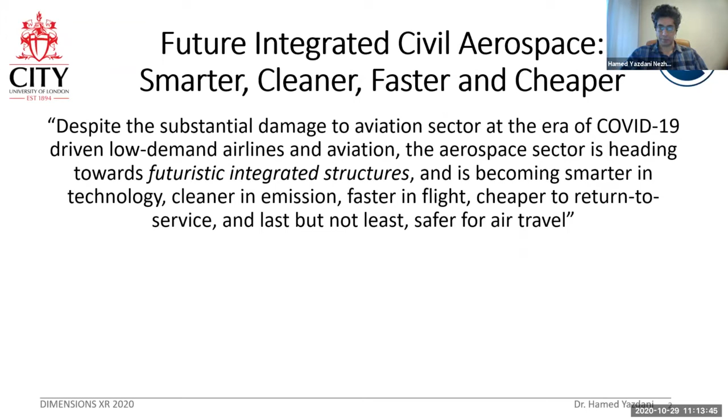My talk is mainly about future integrated civil aerospace: smart, clean, faster and cheaper. This is something I captured from my abstract. I want to draw your attention to the fact that we're moving towards futuristic integrated structures, and despite the ambitious and adventurous look into the future, there are still challenges to overcome. But everything looks very promising for future aerospace at the moment.

I'll come up with an agenda outlining some of the urgent needs, and explain a little on the state of the art in this area. I'll talk about integrity compromise upon integration in aerospace, and integrity improvement possibilities, mainly focusing on new adventurous topics rather than the mature, already well-developed technologies. Moving to fastener-less technologies, and the research we've been carrying out for years, and also the possibility of embedding multifunctional composites for improvements.

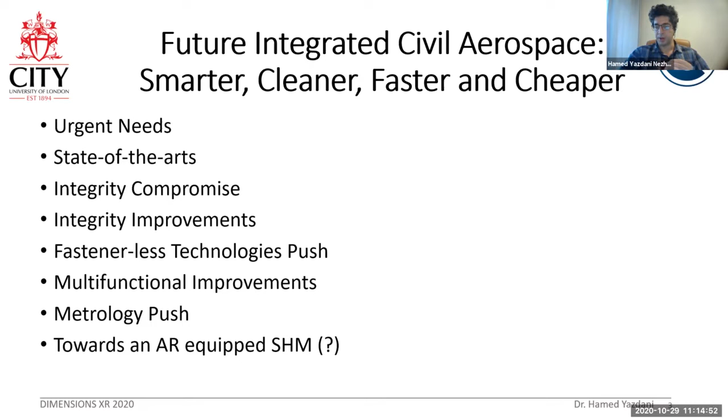There's a huge push towards metrology, especially in structural health monitoring, or SHM, and that's where this talk will be more relevant to this conference, when I talk about towards AR-equipped structural health monitoring. So let's start. That's where we're at.

That's actually one of the main motivations and inspirations for the push towards eco-friendly, sustainable, and smarter aerospace and aviation. What we are about to experience hasn't been experienced for about 3 million years, in terms of the temperature rise and its effect on climate change, and we're already going through that year by year, and sometimes month by month.

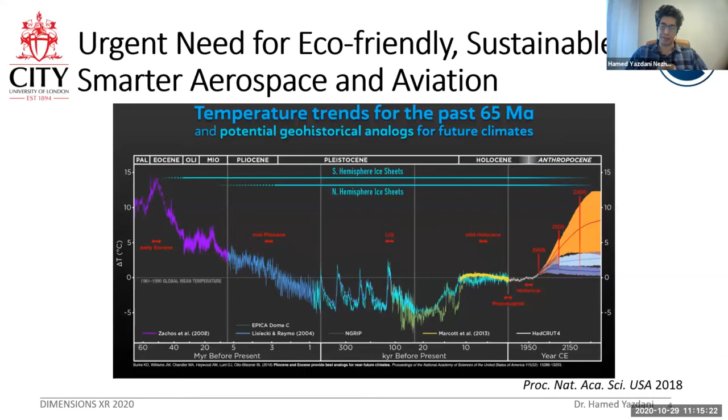That's where we need clean energy equipped transport, integrated light structures in transport, in-flight connectivity, eco-friendliness, and cost-effectiveness, of course, for the development of any processes in terms of integration, assembly, and manufacturing.

That brings up an academic question. Most of this talk is going to be about that: if you're going to bring up new integration and instrumentation technologies, what would be the science behind it? How do we develop that? Have we got mature science backing up such integration and instrumentation, or do we actually need to develop a new direction in science, come up with breakthrough innovation, and come up with whatever eco-friendly, smart aerostructure we need. This I've captured from the European Aviation Safety Agency report 2019, and I think they repeatedly put this in many reports they publish annually.

And the whole message is here: this is the schematic for a 1 hour flight of a 2-engine civil aircraft, say 150 to 200 passengers on board. For a 1 hour flight, about 1,000 kilometers, the engine or aircraft will emit about 8.5 tons of carbon dioxide into the stratosphere, which is a sensitive layer of the atmosphere, and that's the main reason it's causing climate change.

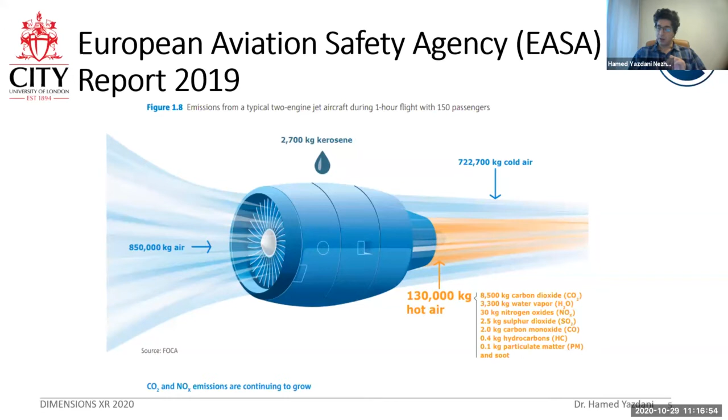This is before coronavirus, but if you capture a flight radar snapshot from that era, you see how catastrophic it can be if you multiply that effect of 8.5 tons of CO2 by the number of aircraft and by the number of flight hours. So it's quite a catastrophe at the moment.

It's great that we've got urgent actions in place, like the Paris Agreement 2015 on climate change, and European regulations related to significant reduction of CO2 in transport structures. That's a very clear message: the top level leaders of the world came together for the first time, probably in the world, to have a unique voice in terms of taking necessary climate change actions to avoid the next extinction for many species on the world.

And with UK support as well, we've got the Jet Zero plan by the council, and there are clear moves and developments in the UK. There are loads of panels, publicly available on Google - you'll see the panel members, almost all of the serious aerospace and aviation industry are on board in the panel and chairs for the Jet Zero plan, to create net zero carbon emission flight by 2050. And that's actually everywhere, for every government.

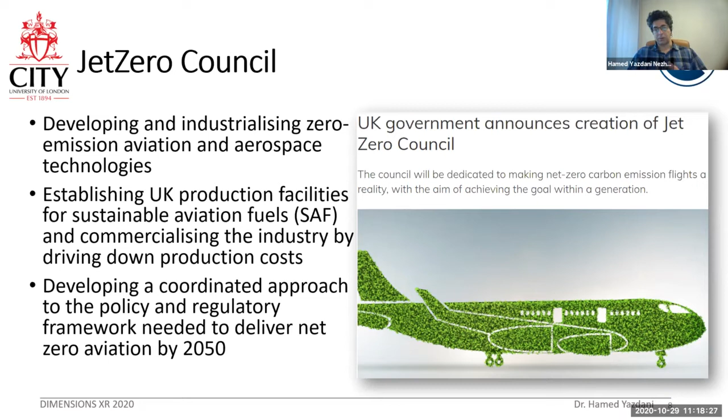It's been out for about three or four weeks now. We got very good news from Airbus that they're moving with a new fleet of zero emission flights, let's say ZEROe, by 2035, which is great news for everyone working in this area. It will bring a push towards new technologies and pioneering activities that bring new kinds of job creation. So it's a great push from the industrial, economical, and societal point of view.

These fleets will be equipped with hydrogen propulsion, called the ZEROe concept aircraft. We're not too far from that. This isn't something developed overnight - for decades people have been working on such concepts, and in academia we also work on developing new technology, which doesn't only involve materials and manufacturing development, but also instrumentation and digitalization technologies.

There's a lot of talk on autonomous vehicles and AI at this conference, and this might be relevant - AI-equipped technology can help us make not only eco-friendly structures for transport, especially aerospace, but make them smart and autonomous as well.

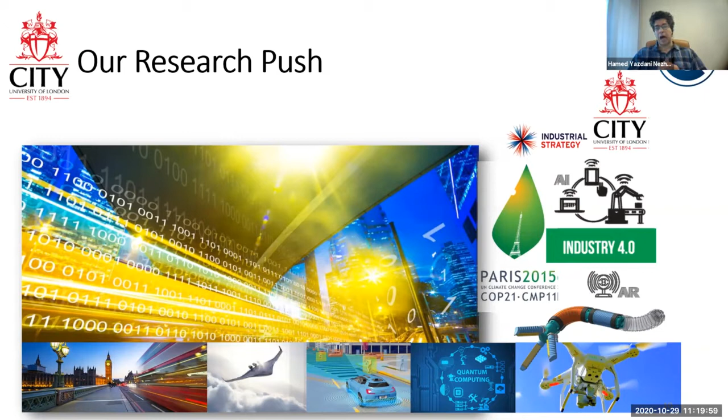I've been honored to work for quite a few years on this very ambitious project - that's one example of a movement that started decades ago. This MAAXIMUS project, if you Google it, is short for More Affordable Aircraft through eXtended, Integrated, and Mature nUmerical Sizing.

Look at the size of this project - it's just one example of Seventh Framework Programme European Council funds, from thousands. There were 57 partners across Europe for more than about 8 years of research on this MAAXIMUS project, led by Airbus, including both academia and industries, and of course public services and the regulatory sector.

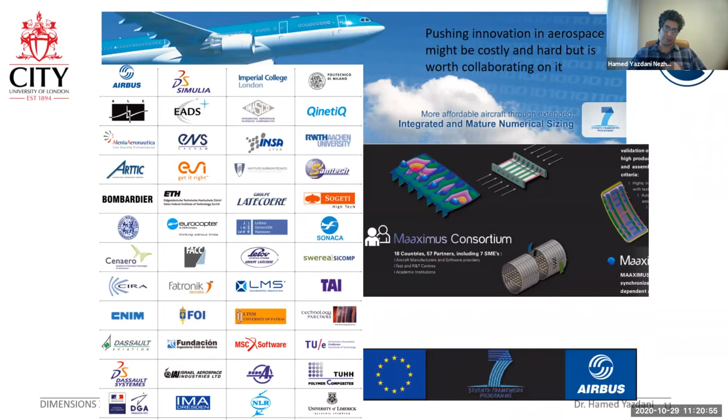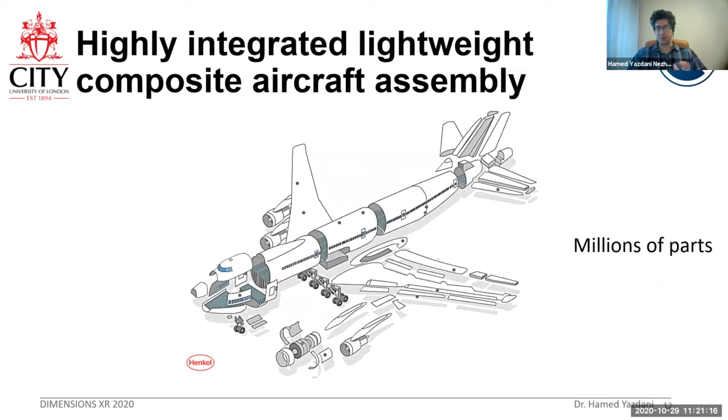Going back, focusing on aerospace, we're talking about a highly integrated, highly composite aerostructure. An aircraft, let's say a civil aircraft, is comprised of millions of parts - this is already an amazing structure.

There are lots of assemblies already existing, and one focus of my research is composite assembly, or composite joints, where a composite part is joined to another composite part - or it can be a metal part, or other materials like plastic. This is relevant in both primary and secondary structures of an aircraft.

That doesn't mean it's without challenges - there are loads of challenges when you come to assembly, whether you go bolting, riveting, or bonding structures, especially for secondary structures, and especially for composite repair assembly, let's say in MRO. There are lots of challenges to achieve the highest integration possible.

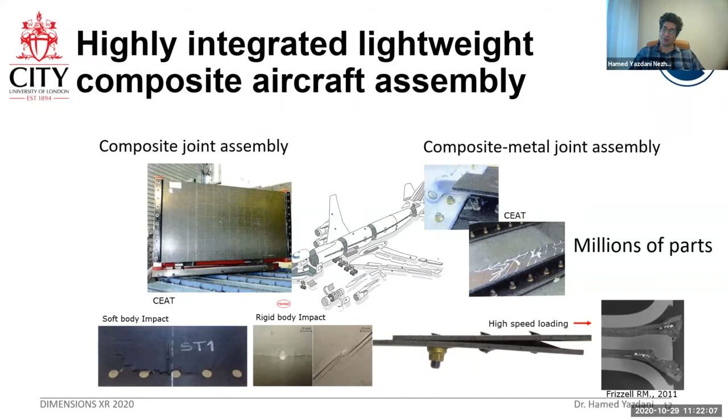Look at this aircraft, the A350, a very successful composite aircraft developed by Airbus - 53% of its weight fraction is carbon fiber. Imagine that this was one of the early aircraft designs to actually develop composites for primary structures.

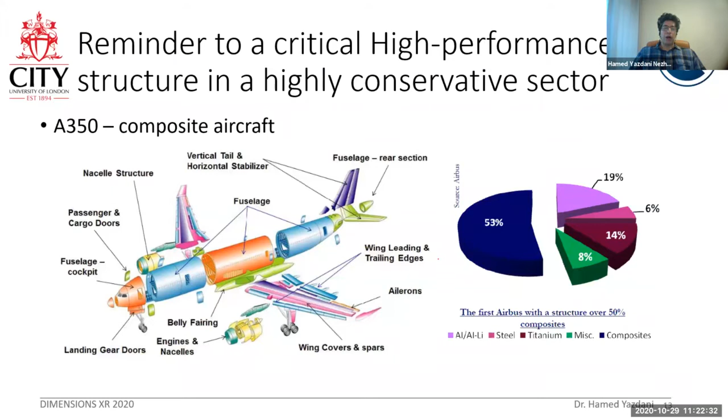So how do you actually come up with highly integrated structures for these aircraft, to avoid damages? And it's not just damage on the ground in the MRO, like a ground vehicle hitting it, for example - it might be damage from a lightning strike, or bird strike simulation. Bird strike events might happen especially during takeoff and landing, but also in service.

This is a very common subject area that designers and aerodynamicists are designing for - flutter. What flutter might cause on a composite aircraft, or a highly integrated composite-metallic assembly aircraft, as you move towards these eco-friendly structures.

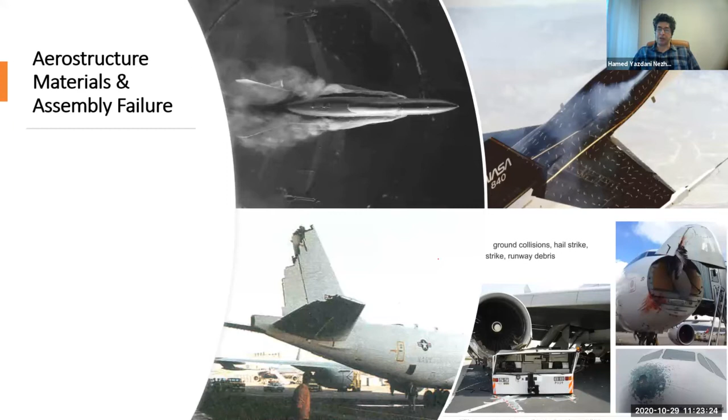These sorts of things can be very catastrophic in terms of the life cycle of the aircraft. But you may not end up with a catastrophic failure - you may have an impact damage instead.

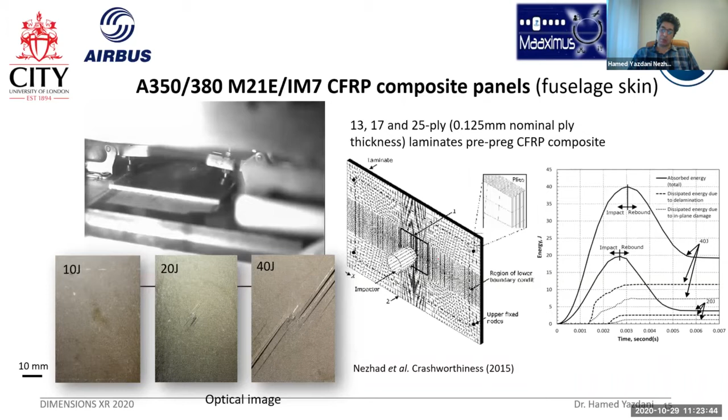This is called low velocity impact damage, which may induce barely visible impact damage inside, and that can still exceed the designated extension area in the SRM, the structural repair manual. This might cause future issues if it's barely visible and not detected properly - you don't know exactly where it's been hit, because your specimen doesn't show much damage at 10 joules or 20 joules.

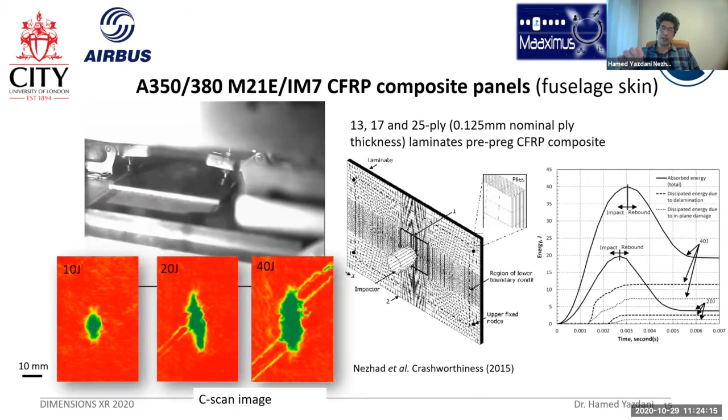But when you do, if you know where it's been tapped, if you do the C-scanning or X-ray, you would see the extent of the damage. And that's where repair becomes very important. Repair, mainly for composite aircraft, has got loads of challenges because you don't want to put a bolt inside a primary structure.

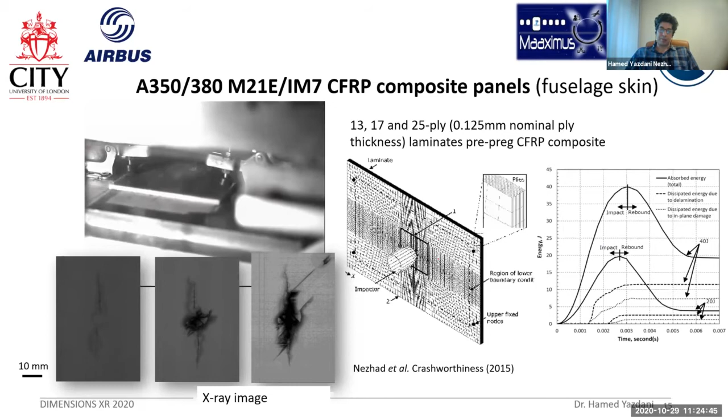Which is carbon fiber, or the toughened material like the M21 epoxy material in A350. So what you're going to do is actually take care of it by bonding, mainly bonded assembly. The new concept is asking how much of this damage is dissipating the impact energy. Based on my research and my colleagues' research, more than about 60% of impact energy is dissipated by interlaminar delamination in laminated composites.

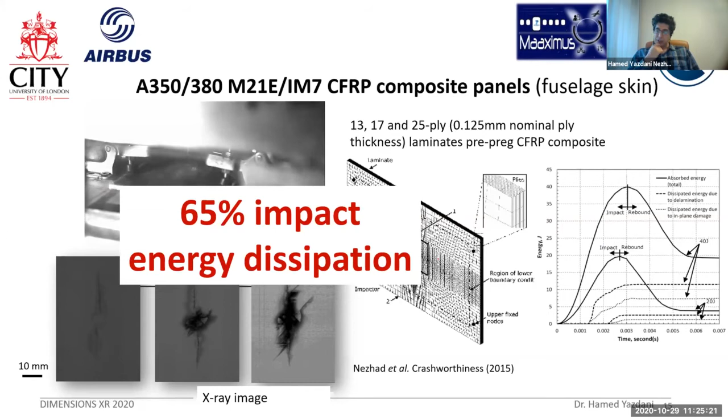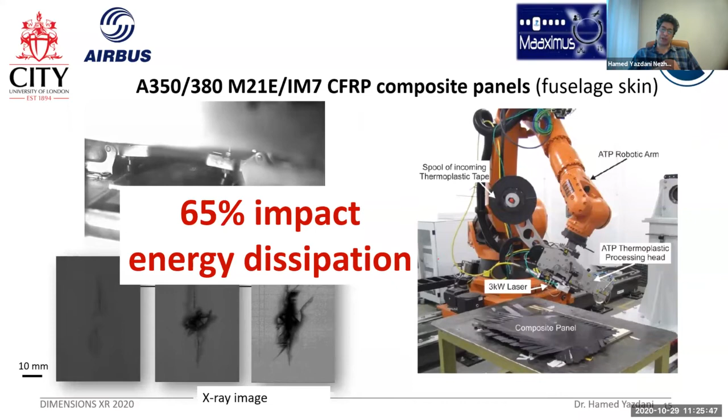One of the amazing technologies developed by Boeing was the Dreamliner B787. An amazing, magnificent, huge filament winding facility that put the different parts of the fuselage all together, wholly integrated, rather than coming up with pre-preg laminate manufacturing or automated placement. In that technology, they did the filament winding of carbon fiber totally continuous in different directions across the huge structure of the B787, which was partially cured with the resin, and then they put the whole structure inside a huge autoclave facility.

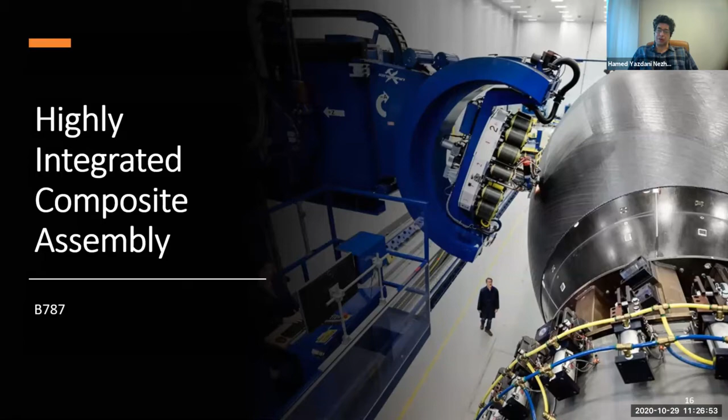That's the scale of the highly integrated structures we talk about, especially for lightweight critical structures like civil aircraft made by composites. But in the assembly, there are different phenomena happening. We mainly deal with bolted structures and bonded structures. The message here is that the damage mechanism introduced in different types of assembly is different from one another.

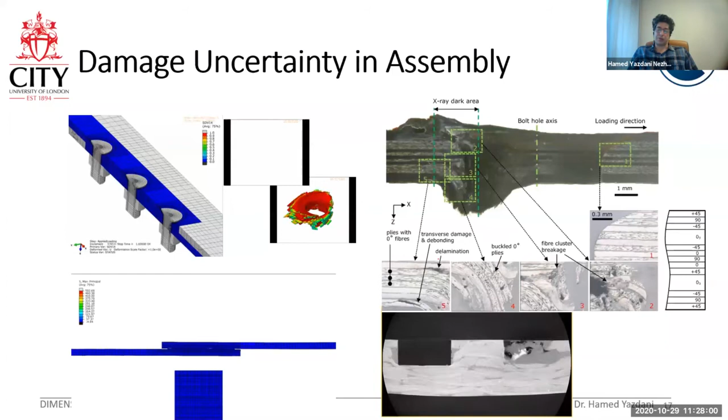Once you introduce one thing in the middle of the uncertainty, you induce a new complexity into the structure. That's what should be taken care of in every kind of design assembly to meet the design limit load in aerospace. One of the challenges again - once the damage has happened and it is repairable, that's the extent of the repair you may go through. The market grows, the worth of the market in terms of turnover is about $22 billion.

And that's the scale - it's like a clean room. If you see the top left image, you have to avoid any kind of contamination, moisture or dust in the air getting involved in the polymerization, because you're working with something vulnerable to moisture absorption - that's polymer. If you're going to do bonding, let's say if you're going to do a co-curing, something like that, there are some other technologies available at the moment for a small size of damage.

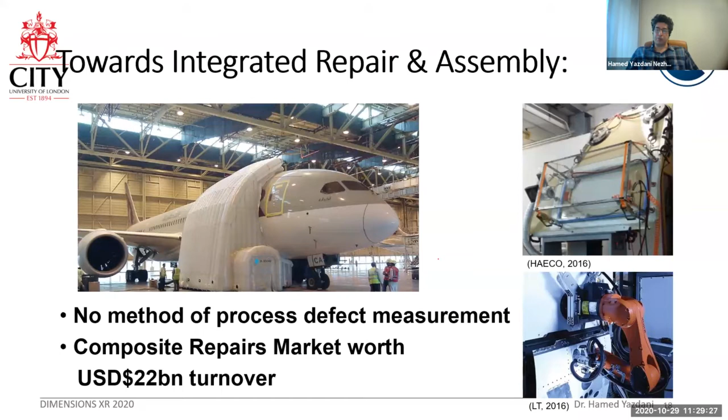Like the right-hand image, like the HAECO innovation for a protective environment, and also the brilliant CARE project, led by Lufthansa Technik. I took this image in 2016, but I think the project started years before that, when regulators like EASA were guiding Lufthansa Technik and many companies attached to that, to come up with a fully automated bonded assembly for the repair process. I highly encourage you to look at the CARE project in future.

We have done some activities as well to come up with a highly integrated structure, not having a single bolt or fastener - that's sort of the fastener-free technology. The person you see doing this is our brilliant senior technician, Jim Hurley, who's been working in composites for about 30 years, three decades of experience.

And we came up with this wing box demonstrator throughout the FLAVIIR project, which I started probably 10 years ago. On the bottom side and at the top side, you see the cross section of this wing box demonstrator, fully made, highly integrated, and you know what? It worked very well.

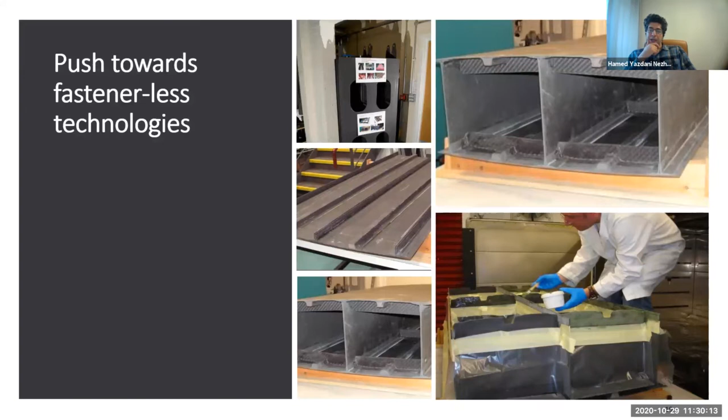Another project at Cranfield University, the FLAVIIR project, or called shortly Flapless Air Vehicle Integrated Industrial Research, was looking at making military UAVs made of highly integrated composites, fully composites, either in the ribs and struts inside, or in the skin of wings or the fuselage.

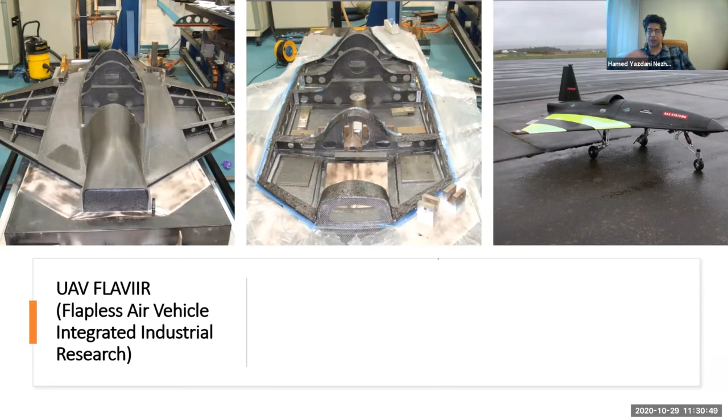That went very well as well, and you can actually look up the video of it being successful in terms of the flight. At the civil aircraft level, of course, people are looking at automation.

This is the state-of-the-art concept already developed. Why is that a schematic? Because that's in the Clean Sky project, for example. We're actually waiting for this to be developed.

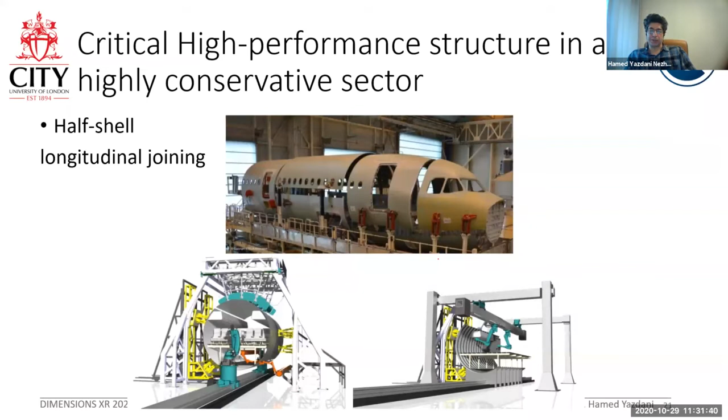If you visited by any chance Safran Composite in south of Paris, as I did last year, you might see a 6-axis amazing robot for taking control of the thickness of the bonding throughout a composite-to-metal or composite-to-composite bonded assembly. That's the scale we're looking at to avoid any human error, avoid any contamination, avoid any uncertainties induced in large structures.

That's another concept taken from Clean Sky last year. Airbus Space and Defence, that was actually this year CFP 11, I think, call of the Clean Sky. Airbus Space and Defence is looking for technology that can manufacture a civil aircraft wing made of longitudinally continuous carbon fibers on the skin, and inside chop fabric, adhesively manufactured or 3D printed, let's say, or 4D printed ribs, still composite but chop fabric ones.

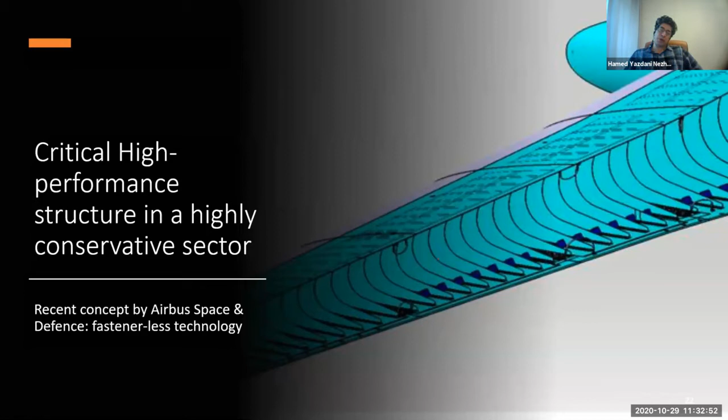Both composites are thermoplastic, either in the skin or in the ribs, mainly because we can not only make it very eco-friendly and highly integrated, we can take advantage of already recycled chop fabric materials that have been proven very useful in providing uniform distribution of properties called quasi-isotropic. So the world is moving toward that, and there are amazing plans by 2035.

We have been actually working on some of these. We try to make this as smart as well. This is one of the projects I was leading, looking at the structural scale, still in laboratory experimentation, to see if I can induce some functional nanomaterials.

In my case it was, for example, graphene and carbon nanotubes. Can I not only improve the structural integrity, but also induce some reliable measurement, especially for cyclic loading? And it went well, actually.

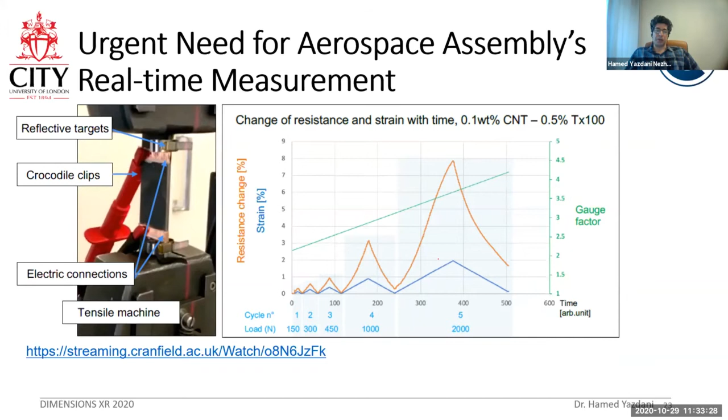We published some of the work in Nature Scientific Reports, reporting that at the structural scale, you would be able to achieve reliable measurement, especially at cyclic loading. Our cyclic loading was increasing loading as well, so it was not like a constant loading during the cycle.

So we came up with a kind of simplified process as well, because processing a new mixture of material, embedding a functional nanomaterial inside a structural grade or aerospace grade epoxy material, is very difficult. It also induces new uncertainties at different locations across a large scale material. You might have different dispersion density and dispersion quality, meaning that at different locations you might end up with different properties.

For our case, enabling strain sensing or smartness in this structure means different sensing, piezo-resistive or piezo-electric properties. That's where we actually reported on a very efficient process and interpretation technique.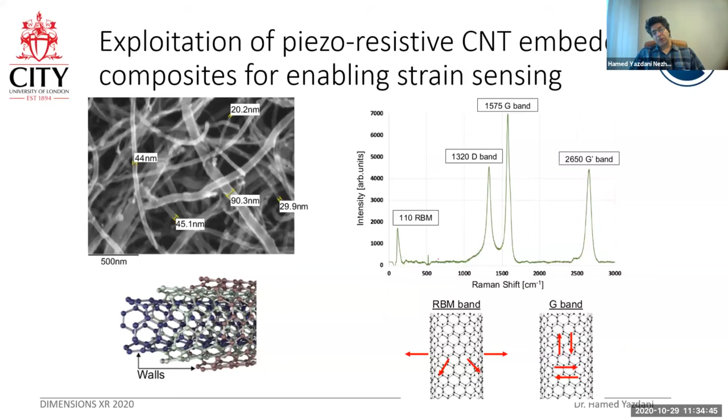You may actually have a look at this Nature Scientific Reports paper we published this year, where we came up with an interpretation technique using this carbon nanotube embedded adhesive for a bonded assembly, still reliable at a structural scale, for cyclic loading and cyclically increasing loading, for detection of adhesive bond defects. That's one of the challenges in the aerospace industry for bonded assembly as well.

You may induce zero thickness defects during a process, either because of not taking care of the process parameters, or because of contamination being involved. So you might end up having zero thickness defects, but the problem is it's very difficult to identify or detect that defect using non-destructive inspection.

Once that's made and part of the structure, you cannot cut it out and examine it. That's why it's very important for NDT technologies to be able to detect such zero thickness defects.

So we say that if we actually embed such a smartness-enabled material, come up with a new interpretation technique, we will get some reliable signals of when the adhesion is going to fade. But I'm going to show you the challenge right now in this video.

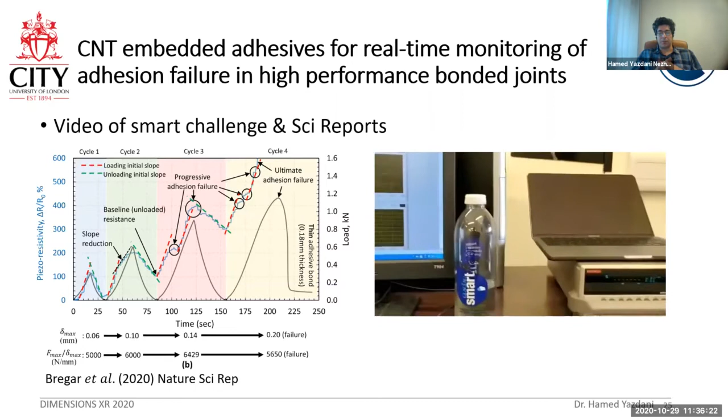We're showing that the system is working properly. We can extend it using the proposed embedment technique from the journal paper. But look what's going on here - let me move it down. Yeah, a load of blah blah. That's our specimen there, and we're looking at that with the laser extensometer for validation as well.

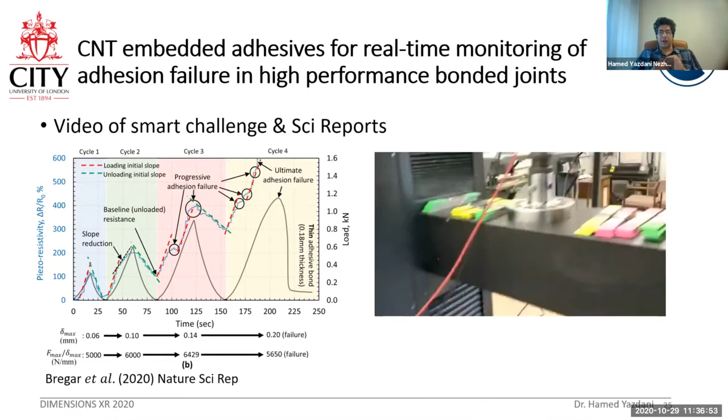But look what's going on. So we got the two-probe technique at the sides of the specimens connected, and it's going to be associated with loads of electronics as well. So where are you going to put these electronics? This is a flat specimen - what if we got a non-flat specimen? How are you going to actually embed such technology in non-flat specimens? So that's one of the challenges.

The scale-up possibility is this. I would say it is very, very possible to take advantage of our continuous nanofiber production and make carbon nanotube at the scale of 100 nanometers diameter, but in meter lengths. And then actually fit that inside a tufting machine like this middle image, and program it to make totally smart materials, highly reliable on every kind of sample, either flat or non-flat specimens.

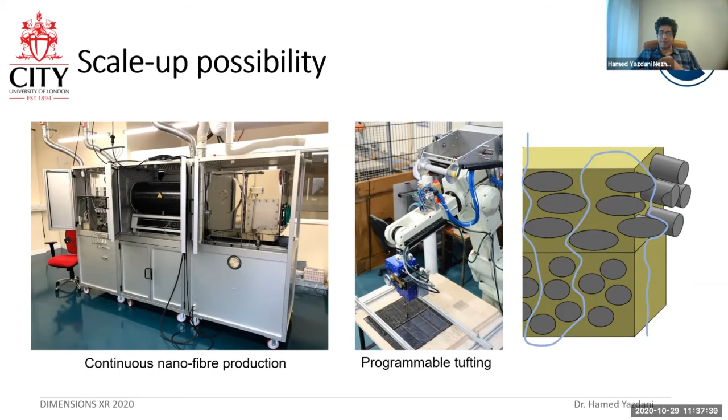All kinds of smartness technologies taking advantage of piezoelectricity are already out there. And if you want to know where that's been used - in piezoelectric sensors, right? So there are loads of sensors already developed, relying upon piezoelectricity as a good property to give signals when your material is being deformed or damaged.

But the thing is, once you actually use, for example, a PVDF material as a layer inside, in terms of thickness it's comparable or still considerable at the level of the thickness of a prepreg laminate. For example, if you've got 200 microns, you might have about 100 or 50 microns of thickness from the PVDF. So if you imagine laying it up over 32 plies, for example, for one section of an A350, you're going to add thickness to that side of the composite component, and also you may add to the weight.

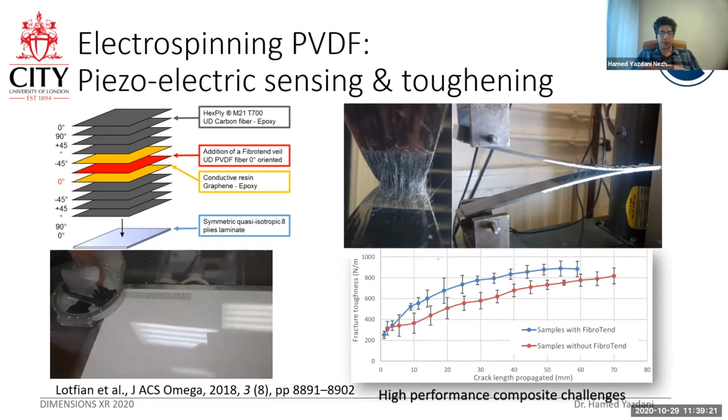Smartness versus structural integrity is always a big issue, and you have to take care of it once you use functional nanomaterials - though they're very low weight, they're very advantageous in enabling smartness in structures, but they compromise the structural integrity. If you want to know how they easily compromise that structural integrity, you can look at our journal papers in the Journal of Polymers. That was ranked the second top highly cited paper last year in 2018 and 2019 - this Q1 journal, which made us so happy because it showed the impact of our investigation had proven right.

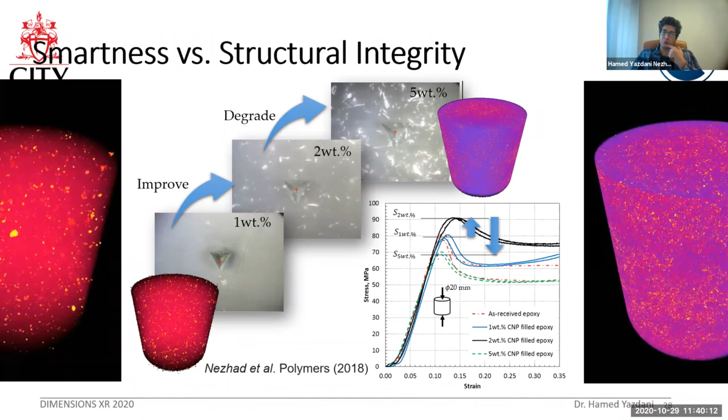But they're very beneficial. We recently used that in a kind of electric car application - we use carbon nanotube to adjust the coefficient of thermal expansion. There's a problem in electric car components. Let's say we've got a lithium battery working - everyone loves that, it's been developed for decades, we got the Nobel Prize last year for lithium battery development. But that has to be stacked somewhere inside a package, a component, and that's a hybrid composite metal joint. So if we have a hybrid multi-material joint with significantly different coefficients of thermal expansion, imagine if the temperature of this lithium battery goes up to about 200 degrees centigrade.

And you're going to take care of it, of course, with the cooling system. But what about the hybrid joints this lithium battery has been connected to? The metal has got a very desirable coefficient of thermal expansion, but generally composites, because they're made of polymer, are not very thermally conductive. So we've been able to achieve adjustment of these thermal properties using these functional nanomaterials as well, quite significantly.

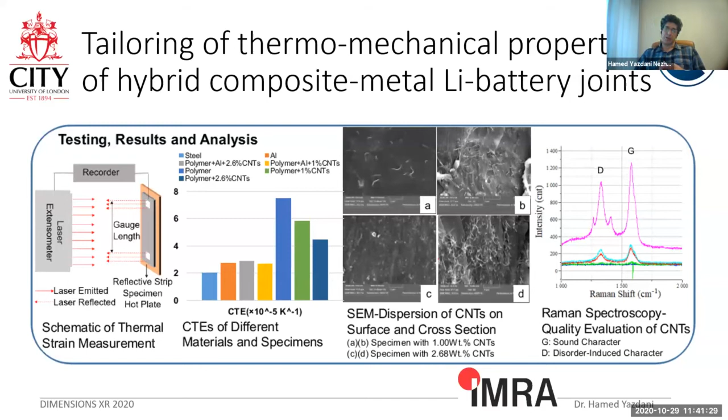There's another technology that people are using a lot already, very well developed, and that's thermography. Laser shearography is another one. The C-scan is another one. You can use ultrasonic testing, taking advantage of sound speed variation inside the material to identify the damage. Thermography works based on thermal conductivity, and it brings up a thermal decay.

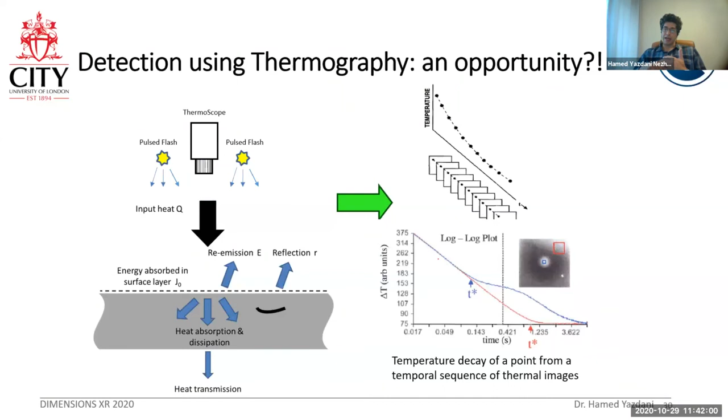So if you scan your image, like my image here, you would be able to see how the temperature, the heat energy, is going inside your body. And it's actually very safe to do that. It's not unsafe, like something like laser shearography.

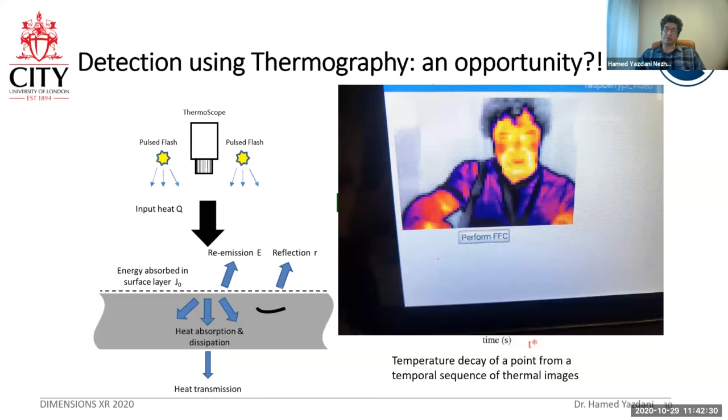And new technology like microwave non-destructive inspection is being developed as well. One of the pioneers is Manchester University. They're very good, but I think one of the concerns would be health and safety issues. But thermography has proven very sound, and you know what, it's scalable.

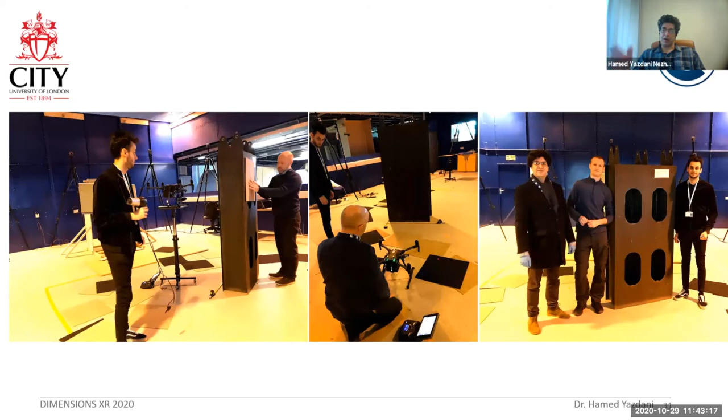So I was working to put a thermography camera on top of a UAV system. It's a very low-weight thermography camera, about the size of a 2 pound coin. And it can fly and actually take an image, with consideration of all the geometry and the things moving around it.

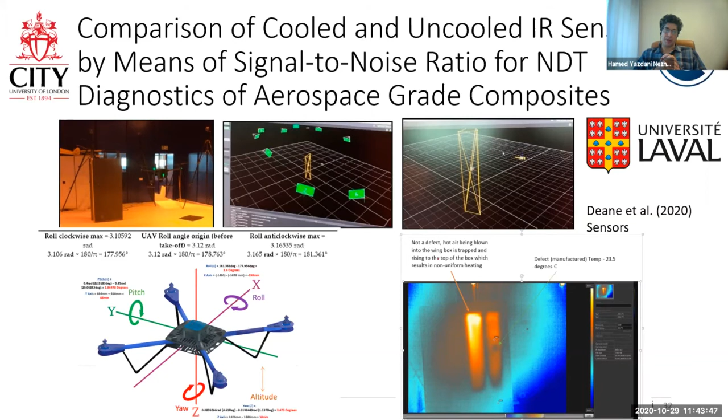And you would be able to see how you interpret the signal you receive from the energy decaying inside the structure, relating it to deformation, defect, and damage. This was helped by research with University of Laval, Professor Maldague's group, who are brilliant on signal to noise ratio for NDT diagnostics.

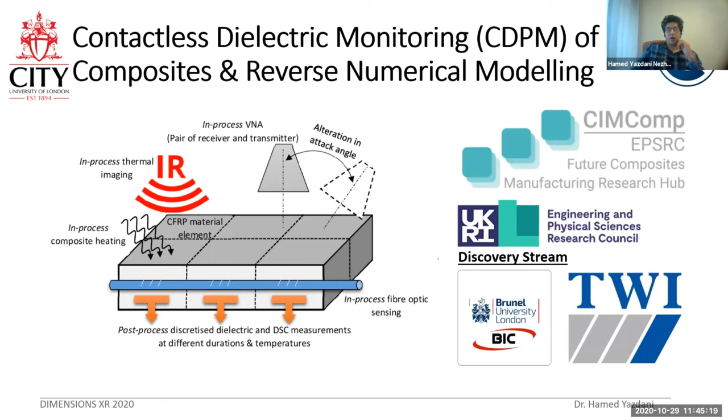You come up with steel horn antennas attached to a vector network analyzer and try to see how the material's response is changing. That's relying not on thermal conductivity, not on sound distribution, but mainly on the dielectric properties that are changing. And then we got different areas of interest.

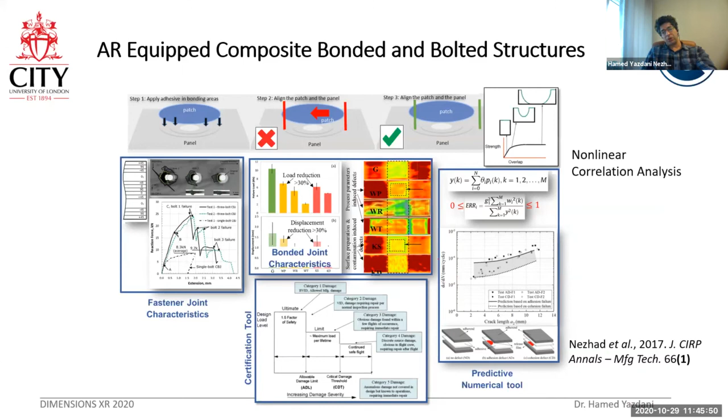For this research, we said, okay, once we have a camera, for many types of research we do, why not take advantage of it for development of an augmented reality equipped composite assembly technique? I came up with 2 different group and individual projects. I wish I had the image to show you what has been done already in the beautiful CARE project using this.

The CARE project has shown that augmented reality is brilliant for maintenance already, and it can significantly mitigate human error. That's one of the issues - if you're a technician being trained at Boeing, for example, you come with different levels of ability to repair something, or even remove material. So the CARE project has taken care of even removing material, with robotic material removal, a mechanical removal technique.

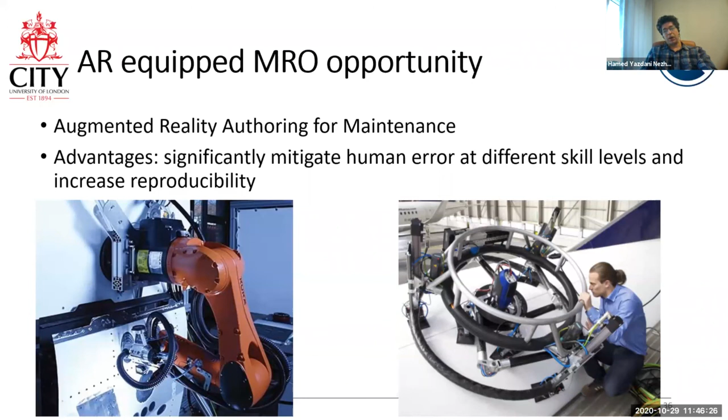The main proposition here by the AR was that if you rely on geometric features, can we find out mechanical performance? Can we relate this using correlation analysis? If we have some visible features, can we identify invisible features that are lagging behind using NDIs, like the zero thickness defects that might appear in a bonded assembly or in composite plies and laminates. And that, if equipped with the regulations for the system, can automatically lead to permit to fly.

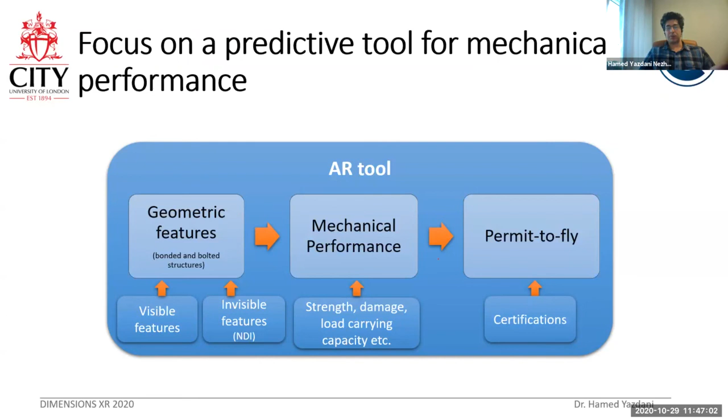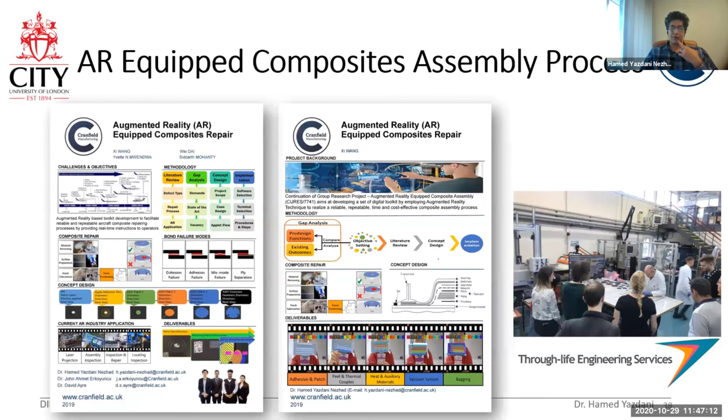So we actually carried out two separate projects on augmented reality for composite assembly and repair. We used a tablet version for this, and this looks amazing to us in our sector. Probably that's just daily common practice for you guys working in VR and AR already, but for us it was very exciting to see that it works using a HoloLens.

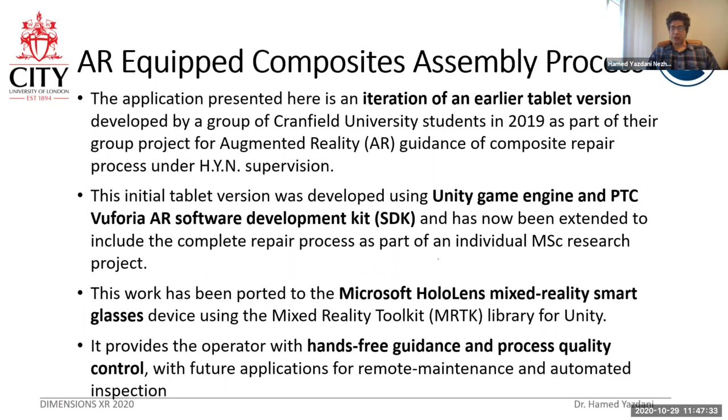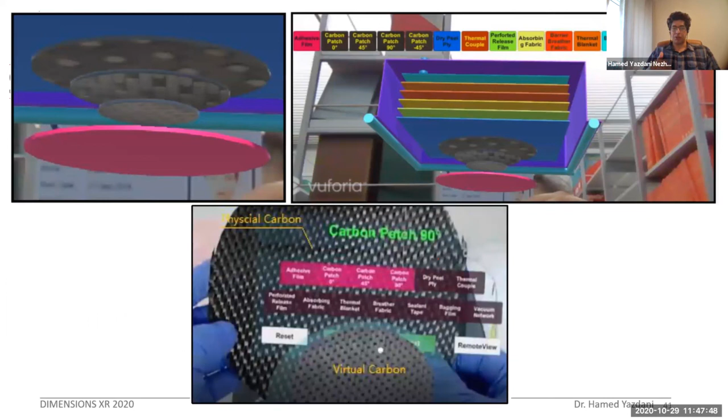We took some of the demonstrators with the HoloLens and tried to do a composite assembly. CAD was provided to match the direction of the fibers that we positioned on each of these plies, and it worked very well, actually.

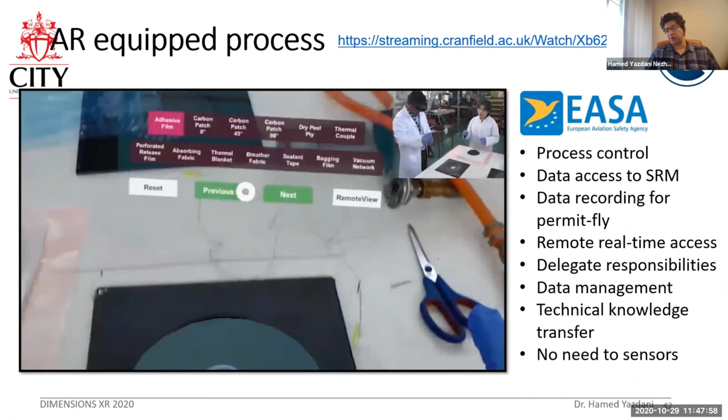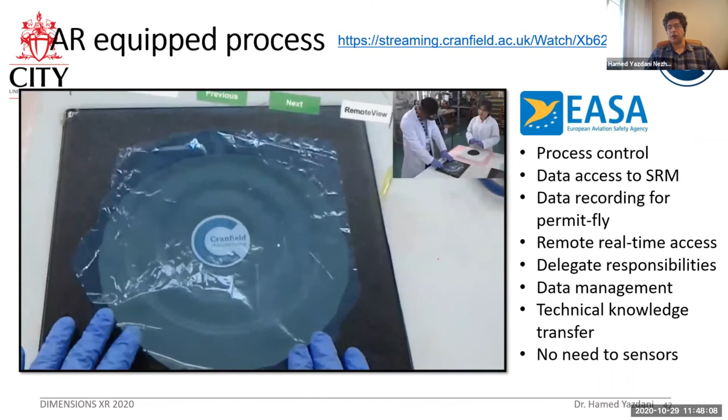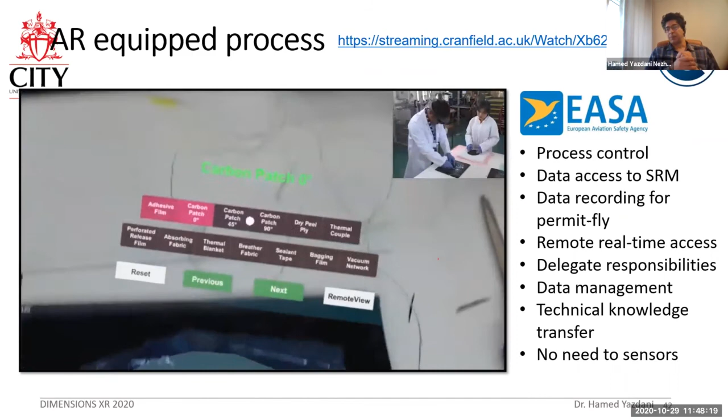So we got one of the senior experts on board and got comments on how our technology can be benefited further. First of all, comments were that this is very good technology for process control in MRO for aerospace applications. Data can be accessed to the SRM automatically, and you don't need to go back and look at the SRM, come back in place like a technician. It's always there, visible in front of your HoloLens.

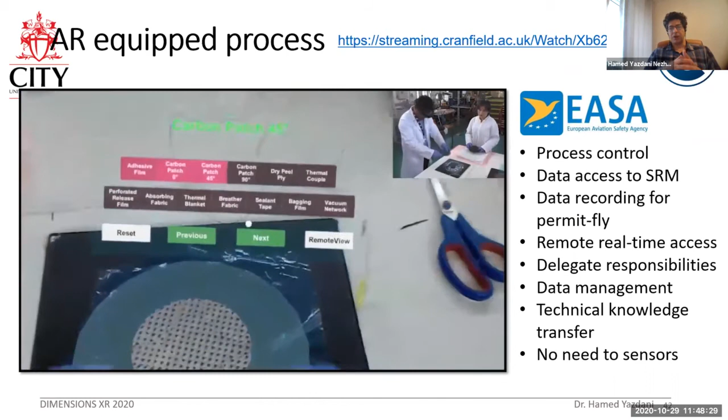Data recording will be provided through this for permit-fly and other kinds of future investigation. Remote real-time access might be enabled. And of course, that brings up some delegated responsibility in what has been done, because this is a lay-up structure.

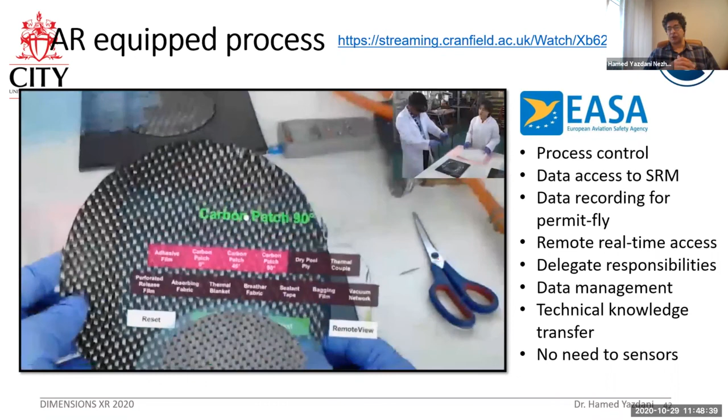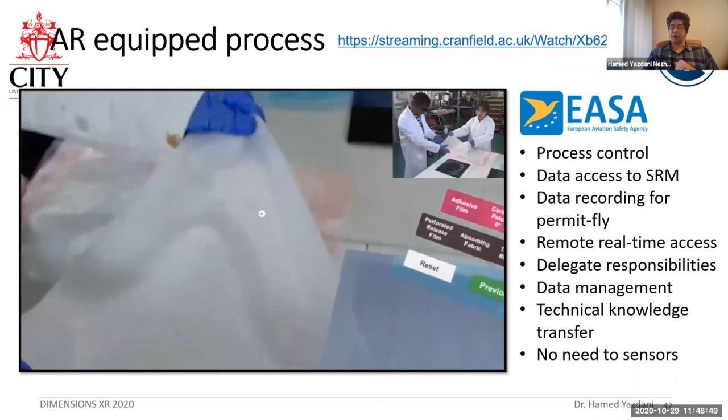This is multi-layered. Once you have laid up, you wouldn't be able to see it until you section cut it. So you don't know what has happened until you see something step by step like this. So it's actually a great education tool as well - we can bring students on board and let them exercise using our augmented reality tool for the composite process.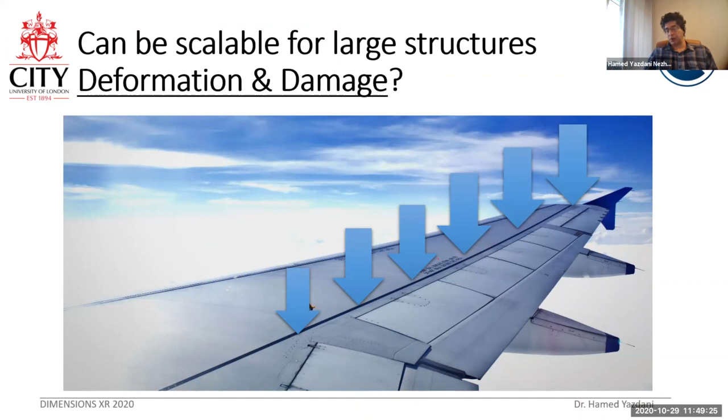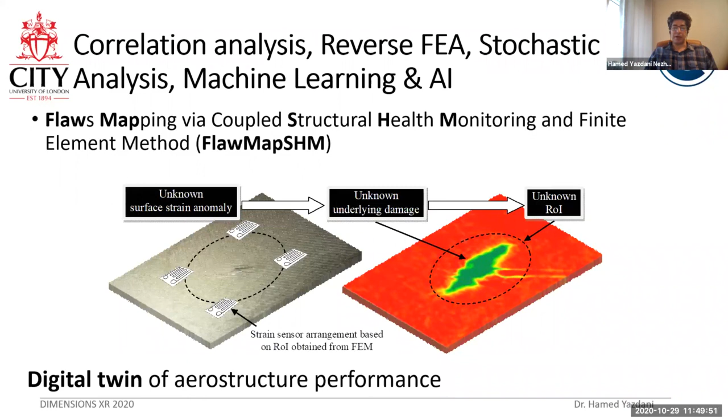That's one of the ideas we're looking at, called FlawMapSHM - looking at the surface on the left-hand side, identifying some features in the surface data, and translating that to internal damage. Would that be possible? If so, that will bring up a digital twin of aerospace aerostructure performance for the future.

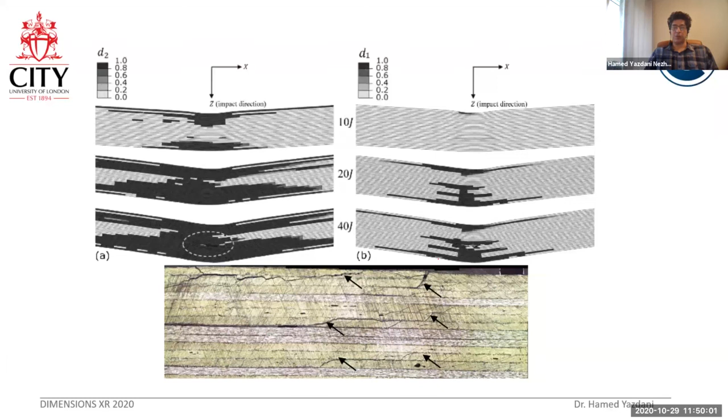Just don't forget there's a very, very complex damage mechanism and damage topology inside a composite layup. It's not a single damage. So can we actually translate that?

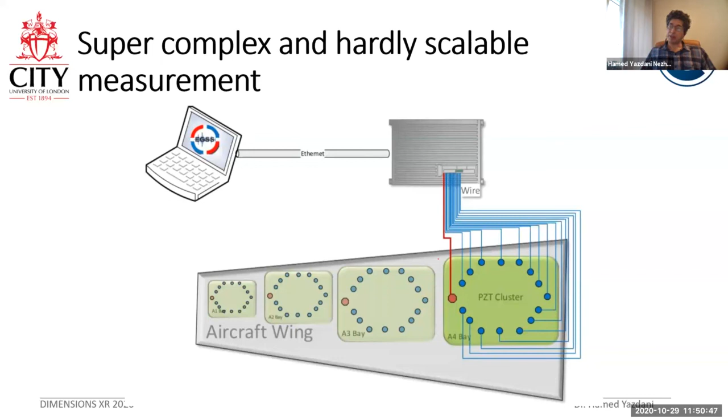There was some innovation to embed things like PVDF material and IDE electronics all over the place. We already know it's a big challenge, and everyone knows that. So we think that if you come up with a contactless remote technology, AR can also help by overlaying such additional information - that would be brilliant, and people are looking for that.

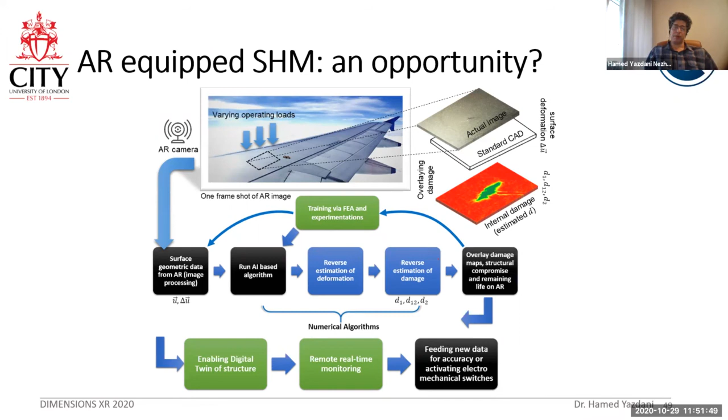That's just a summary of what I said in terms of proposing structural health monitoring based on augmented reality. This is an ongoing project at the moment, and we hope to succeed in getting the proof of concept for it.

Thank you for your time, and I would be happy to answer any question.